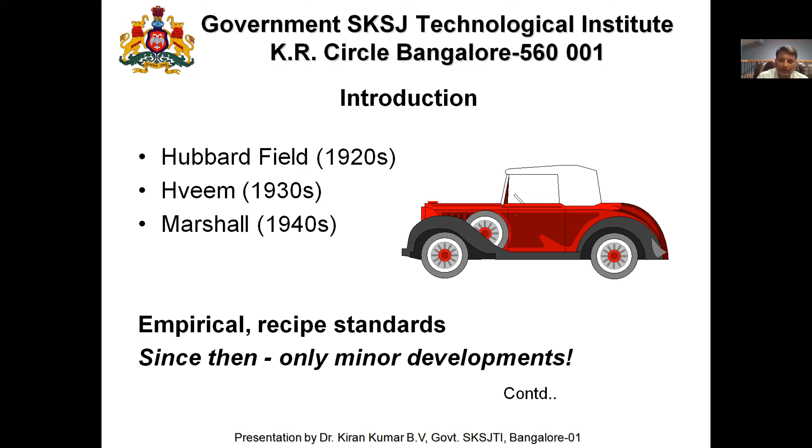So what made me think that we need a change? From the 1940s, if you see the kind of traffic we are experiencing, the fatigue repetitions coming onto the pavement have tremendously changed the scenario, and the stresses are mounting onto the pavement more and more in terms of cumulative standard axles, the vehicles moving onto the pavement, and the weather conditions which are changing due to climatic change.

So wetness again becomes a major issue in many places. If you have witnessed, the failures of the pavement are basically taking place due to lack of proper drainage or the moisture that is coming in. So we need to tackle 3 W's: weight, weather, and wetness. If we are able to tackle these 3 W's in flexible pavement, it is definitely going to perform till its design period. This was triggering and made me search what exactly is happening.

I cannot simply say that the practice from the 1940s, which we have been designing with, is going to be replaced by a new set - people will definitely laugh at me when I try to explain something new. So I had to make some background search, understand basically what is exactly happening and what we need to do further.

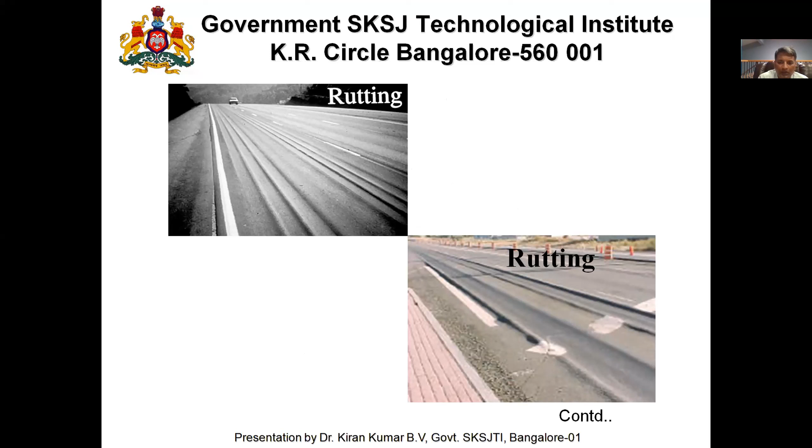I went deeper and found out there are 3 major issues in the permanent deformation sector that the entire world is tackling. That is called rutting, which is basically a kind of deformation or shear failure that takes place on the top surface, and material consolidation takes place on the wheel path. On national highways, state highways, and many major arterial roads, you might have witnessed this particular kind of bowl-like structure, depressions formed on the wheel track.

The next thing was fatigue cracking, basically due to the application of load and release of load, which simultaneously causes a kind of fatigue or bending action onto the pavement. This in turn causes a tensile force applied at the soffit of the layer, the bottom portion of the black layer, which tries to pull on either side - radial tensile strength. This causes a rupture if the bonding or the stress applied is more than what the material can withstand within its elastic range.

It starts tearing apart, and the aggregates which are held together - for your information - are all held with a layer of bitumen at 6 to 8 microns. So the bitumen which coats onto the aggregate surface, its thickness would be around 6 to 8 microns on each aggregate. When they are held together with this 6 to 8 micron thin layer, they are subjected to this kind of tensile force, and if they are not able to withstand it, it starts cracking. People think that cracks come from the top - it's not the way. Most of the reason would be from the bottom.

We need to check when the crack appears at the bottom, where tensile strength is more, then it starts propagating onto the top because there is a discontinuity of load being transferred from the subsequent frequent loading of vehicles or the wheel. When it starts moving on that particular area, it transmits the load, and at the crack portion it acts differently because it is not a monolithic structure. So the difference transmits onto the surface, and by the time it reaches the surface, the damage is already done.

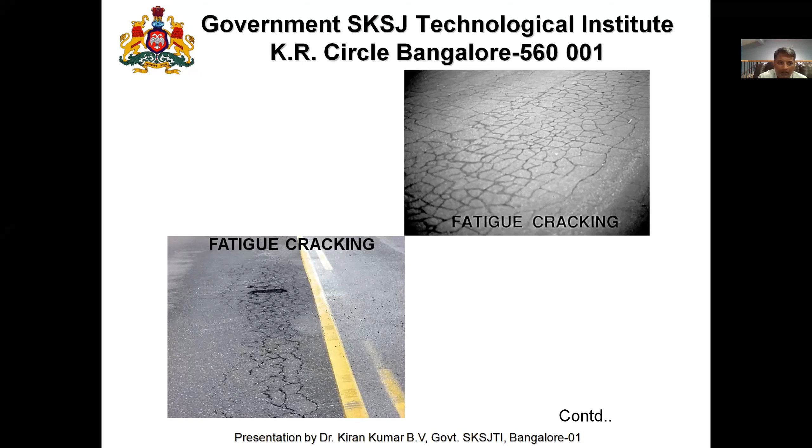The third most common failure is due to frost action, where lower temperature comes into picture. This is very limited to few places in our country. We have this problem when the soil gets moisture, and that moisture completely freezes and forms ice. When frost action takes place, conversion of water into solid ice increases the volume, and this causes separation of the soil layer, pushing it away, which causes discontinuity of load dispersion coming from the top layers, leading to cracking.

When the summer cycle comes, the ice that was formed starts melting and escapes through temperature rise as water or moisture into the atmosphere. Now the separation caused by the expansion of water into ice due to increase in volume, that gap in the soil which has been pushed can never patch up on its own. So discontinuity of load again comes into picture, similar to what you've seen in fatigue cracking.

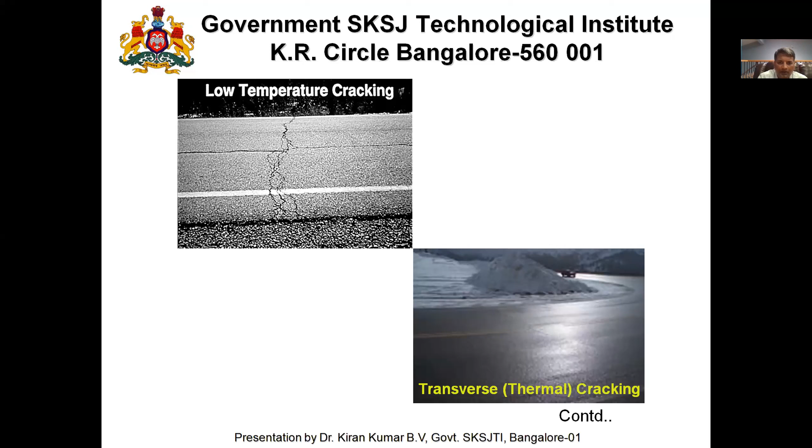Once we understand why this continuous failure is taking place, I started asking all these questions, and as I moved through it, I found there's a thin line between what we call a good and bad mix. It's a very thin line in the definition of calling a mix good or bad.

No one can define that so easily without having certain data which completely supports that this mix has performed well over a period of time. It takes a lot of time to understand that. The design periods have to pass, records have to be created, and continuous monitoring has to be made, and then we can say it's good or bad.

Now, everything good or bad originates from certain laboratory studies only. When the laboratory studies themselves have a lacuna, we are not looking at those lacunae and simply saying the pavement is not performing is not correct. So in that direction, I started looking into why some mixes perform well—what we call good mixes—and why we call some mixes bad mixes.

I started looking into those aspects and collected a lot of data, did an extensive literature survey, went to CRRI, spent about 6 months there, and went to libraries to study various literature available throughout the country as well as abroad.

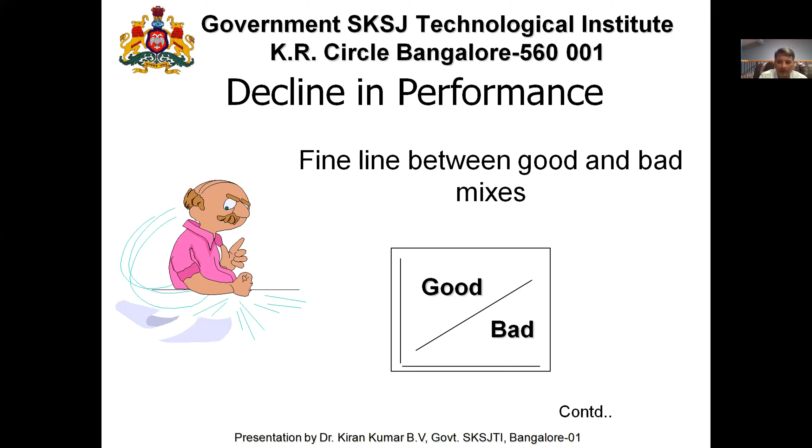So I discussed with a few people like Professor Kandhal and my professors and various agencies handling this. And I found that usually any mix design, irrespective of Superpave or Marshall method, only the compaction procedure is going to change.

But more or less, the steps required for a mix design to be tailored remain the same. First is material selection, second is designing the aggregate structure, third is designing the binder content, and fourth is moisture sensitivity. Now, people in this particular field can understand these 4 steps.

For the general audience attending this session who are from outside our field, I'll tell you the complete picture of what we've been trying to discuss till now. All that you have seen earlier was just an introduction on how the development took place.

Now we are at the stage where we have zeroed down our problem: even though we do all these 4 steps, and carefully choose our aggregate structure and the binder required to hold these aggregate structures together, we still see pavement failures taking place within a premature period of 6 months after construction.

Several times it is within 1.5 to 3 months. I see a lot of cracks coming onto the pavement. Why is this happening? This is a major question I have always been asking.

When there are so many quality control checks, so many people involved, and every point is cross-checked by an independent agency, the PMC looking into it, third-party testing—so many things have taken place—but still the failure takes place. So any mix design or construction basically has these 4 steps.

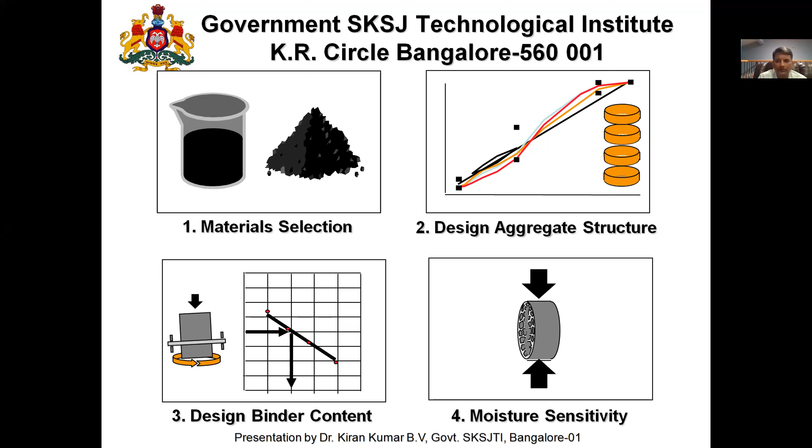That is, both the thawing cycle and freezing cycle have to be looked into. These four steps basically cover the entire mix design, and my focus is always on the third one, because the binder content is the ultimate thing. Without knowing the target maximum density and maximum air void, all the procedures we do will be a waste, since it won't match field conditions. Except for the Superpave gyratory compactor, which somewhat matches field conditions, but it is a very costly and sophisticated equipment. Maintenance of it is always a problem, and it is most of the time under repair rather than functioning.

Now, material evaluation in the first step, in most countries, is based on their grading system. Earlier we had penetration grading, but now we have viscosity grading. Penetration grading is a quick way where people try to understand, by applying a load of 100 grams on a bituminous substance, the shearing rate of this needle for 5 seconds when this 100 grams is applied at 25 degrees centigrade, and how much depth the needle will penetrate. There's nothing concrete saying this is required as a performance test to the field. It is only a quick test to understand the grade of bitumen.

Now the second thing is the softening point test. This test is somewhat similar to the liquid limit, where soil changes its state from solid to liquid with a small shear force at maximum moisture content. Similarly, bitumen changes phase from semi-solid to liquid, or starts flowing, at a particular temperature, when you heat it at a rate of 5 degrees centigrade rise per minute. That change from solid to liquid state is what we are interested in. This is very useful to understand, when the binder is used at the project site, at what temperature it loses its solid or semi-solid state and starts acting as a liquid, flowing away from the aggregate instead of holding it together.

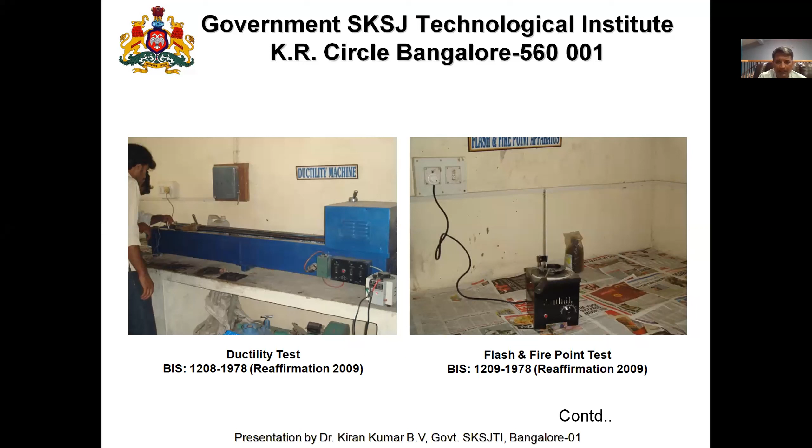Now, all these tests, even today, if you go to the Bureau of Indian Standards, are all valid, and this is what every engineer does to select the material. Any person related to pavement engineering or flexible pavement is doing this in most laboratories, and the higher contractors, the number one contractors handling national highways and expressways with bitumen, are working with these tests.

Now the third - we are into viscosity grade bitumen, which came after several years of this change. The test methods have changed, but most developed countries have moved into performance grade bitumen, PG grade bitumen, which I will explain in due course of time.

Now we need to understand viscosity in terms of absolute viscosity and why we need to understand this. It's because we are handling a material which is a non-Newtonian fluid, basically changing its shear rate with change in temperature. The binder is a viscoelastic material: it exhibits viscosity characteristics and it also exhibits elasticity characteristics. So we need to understand, for a given material, how it behaves as a less viscous material and how it behaves as a high elasticity material.

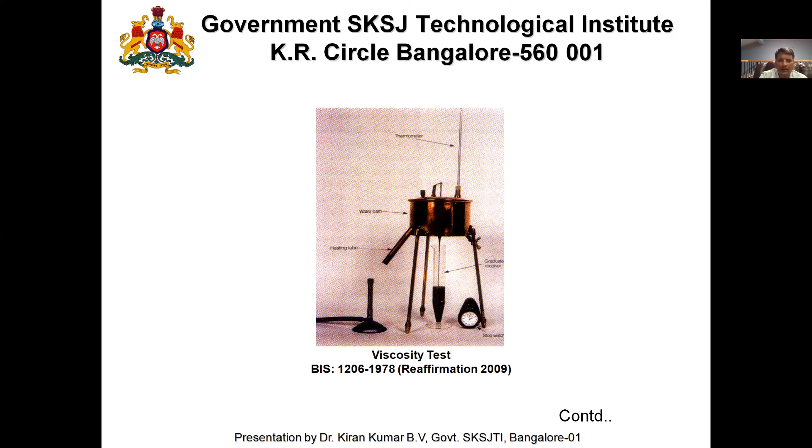We need to check and understand this for better design of the pavement layer. Viscosity gives us an idea of the binder: when it is to be handled, pumped, transported, coated, and the resistance when this coating is done on aggregate. When the temperature drops, how it binds together and holds the matrix together, and when it is compacted and gets densified - all these depend on viscosity.

Now I was talking about something called PG grade, which is a performance grade bitumen produced by most developed countries. When we look into these specifications, why I'm bringing this up is that all this time we were learning what we do in India. Even today, we are following the same specification with certain modifications. In 2013, if you look at IS 73, for the choice of bitumen with all the tests I told you previously, 90 to 95% of those tests will be followed.

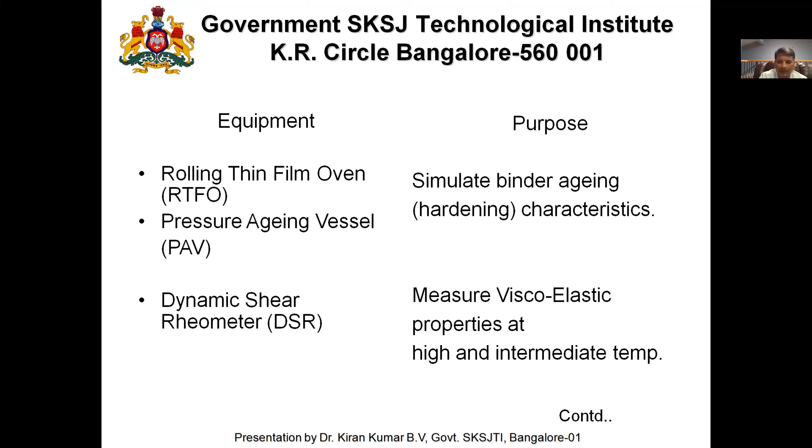There are certain changes, like aging characteristics added with RTFOT, whereas in other countries this is routine practice. They test for 3 criteria: one is for aging, another is to measure the viscoelastic characteristics of the bitumen so that they can tackle the mechanistic design of the pavement - the design values from this test go into the pavement design.

Then we have the rolling thin film oven test, which is for short-term aging. This occurs when you are heating the bitumen and pumping it from the reactor to the bitumen tank or to the bowser for transport. The bowser then reaches the contractor's place, where it is again heated to keep the bitumen in a liquid state so it can be easily pumped from the bowser or truck to the contractor site's tank.

The pressure aging vessel is an accelerated test which tells us about the bitumen's aging characteristics after 20 years - meaning after construction, how the bitumen will harden or age due to the presence of oxygen and UV rays from the sun. All these are routine tests in developed countries for material selection. We are not doing this, but without this exercise we still expect the bituminous mix design and the engineer to sustain the overloading that we are causing.

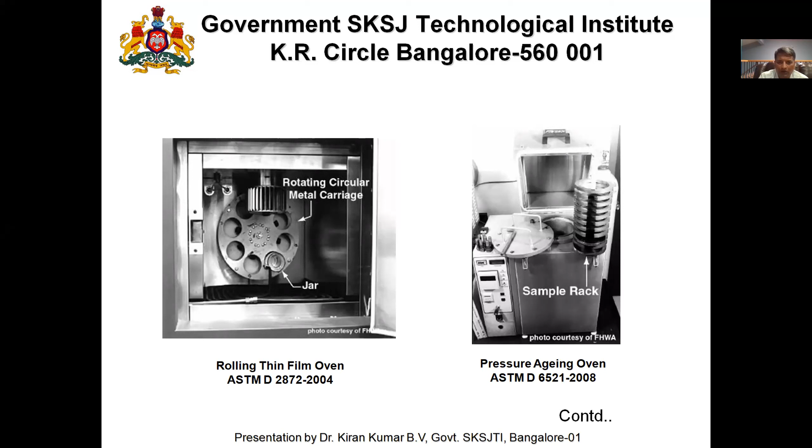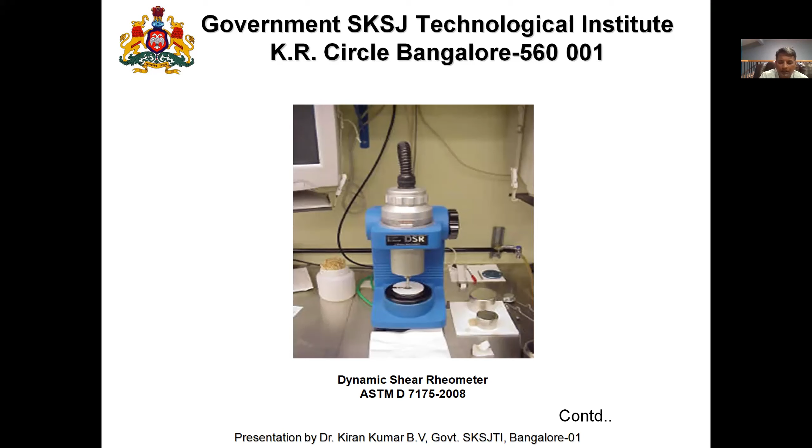Now this is called a dynamic shear rheometer, used to understand the viscoelastic characteristics of the bitumen. This itself could be an 8 to 10 day course - learning how to do this dynamic shear test, how to do strain control and stress control tests, how loading is applied, and how to interpret the results and transfer them into field conditions in terms of complex numbers that come out when shearing force is applied onto the bitumen sample.

Then we have the rotational viscometer, instead of the standard viscometer seen previously, where we try to measure the characteristics of the binder during flow. Then we have two simple tests, the bending beam rheometer test and the direct tension tester, which are used to determine the elasticity behavior of bitumen at lower temperature.

That is why in foreign countries, when a PG grade is mentioned, such as 62 minus 12, it means the binder will hold its viscosity at 62 degrees centigrade higher temperature, and will also hold its elasticity at minus 12 degrees centigrade. That is called the performance grade - on both the higher side and the lower side, the bitumen will work.

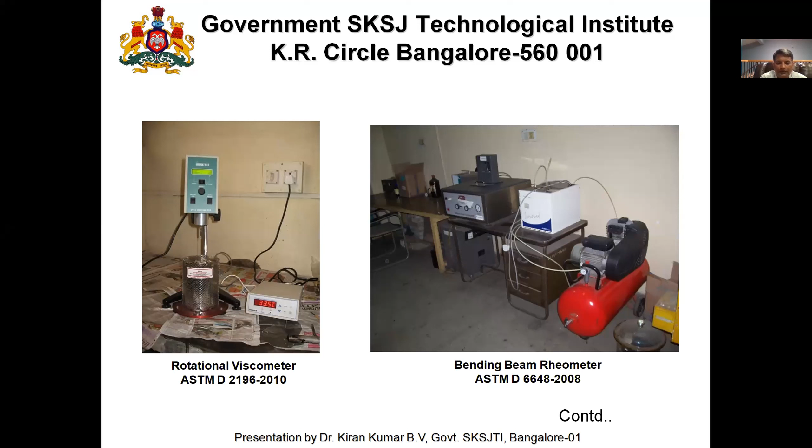Now these are the equipment where you can see the rotational viscometer and the bending beam rheometer. It is a small asphalt beam on which 3-point loading is applied. The slope is taken, and we try to find out how the failure takes place.

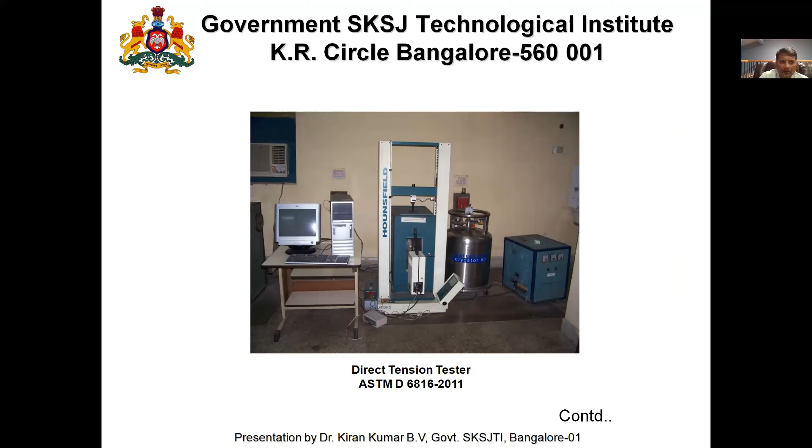This is a direct tension tester used for testing the binder when its values are not being accurately determined by BBR, bending beam rheometer. These are required to understand how the pavement behaves in the later part of its life.

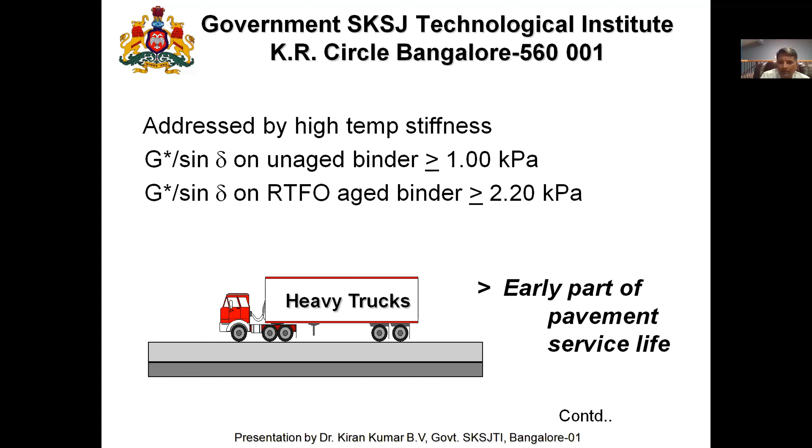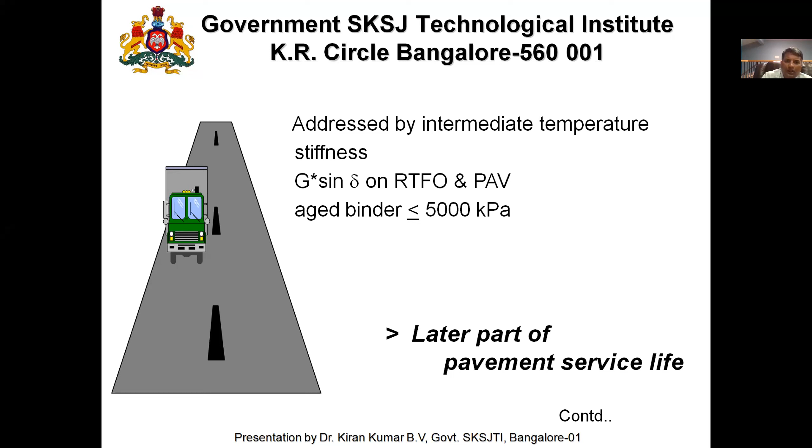So these complex values, the G star by sine delta for unaged binder and aged binder, are given here. The minimum value should be greater than this. Then after aging, meaning during the service period and in the later stages once the service period is over, again we have values of G star sine delta after aging through RTFOT and PAV, whatever value comes, whether it falls within this range of 5000 kPa. All these things have to be determined before finalizing.

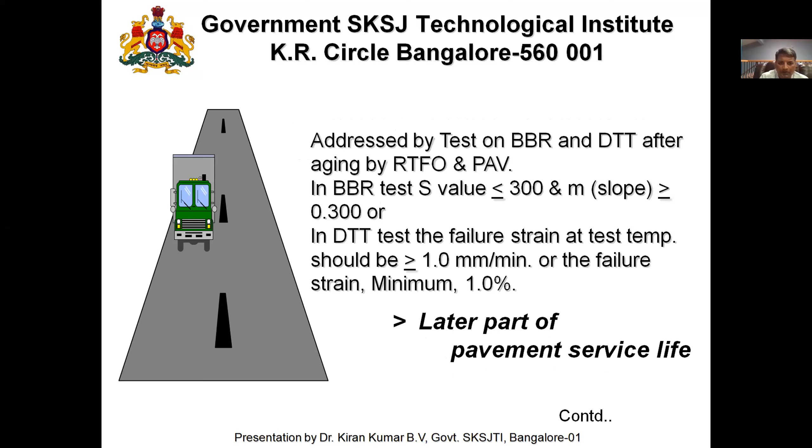Similarly, for the test of low temperature cracks, all these are related to my 3 failure modes: rutting, fatigue, and low temperature cracks. These 3 have to be tackled in the test, and that is why these particular test examples or processes have been developed.

Now I was talking about the grading system based on climate. I have given an example: PG 64 minus 22. PG means performance grade binder, based on the 7-day average maximum pavement temperature collected over a period of several years. That is what the higher side indicates.

Minus 22 is the minimum temperature that area would experience, or the project for which the pavement is run would have experienced. So 64 minus 22 means the binder will hold its viscosity without changing from solid to liquid even at 64 degrees. At the same time, if the temperature falls to minus 22, the binder will never become brittle, it will hold its elasticity even at minus 22.

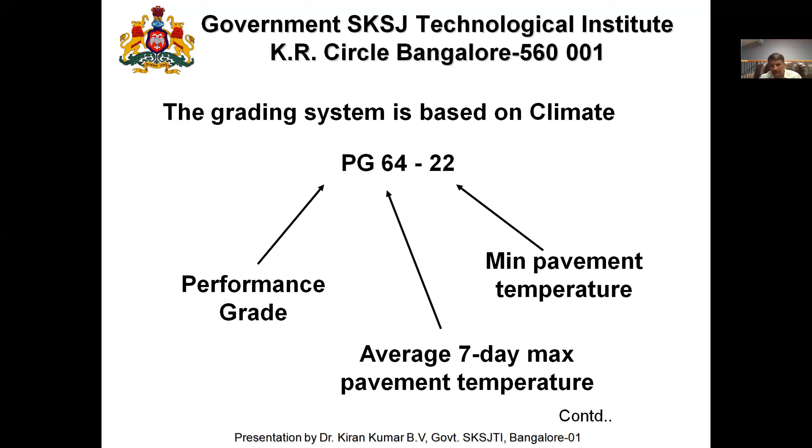So this is a kind of grading system based on climate, and most countries are following it, but we are not at this stage.

Apart from this, under material selection, everything else remains the same, because aggregate coarse angularity, fine angularity, toughness, soundness, it all remains the same. I will not take much time here, I will just get into it. Your shape factor or combined index remains the same, and it is done in a very simple manner.

They take this particular ratio as 1:5. Instead of going for 0.6 times the average dimension and 1.8 times the average dimension, they have fixed it as 1:5, meaning if the thickness is 1, the maximum length the aggregate can possess is only 5. If the thickness is about 10 mm, the maximum length allowed is about 50 millimeters.

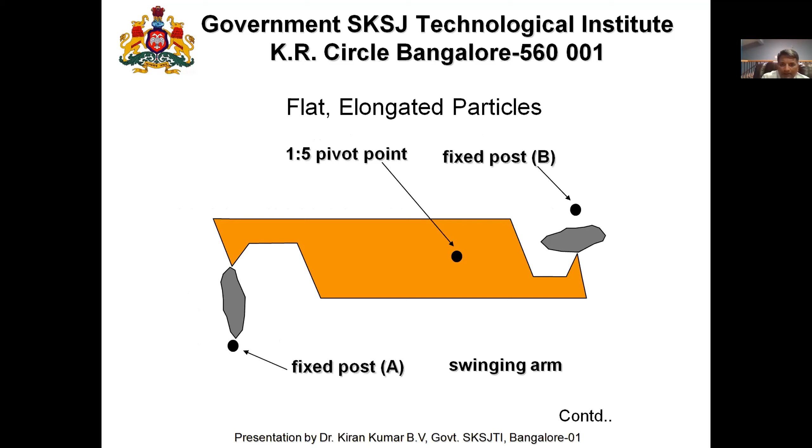And the second one is design aggregate structure. The SuperPave has given several control points through which it has to follow. That same thing has also been taken into account, and even the Ministry of India gives you the upper and lower limits. Everything is targeted to the maximum density that needs to be achieved for the mix design.

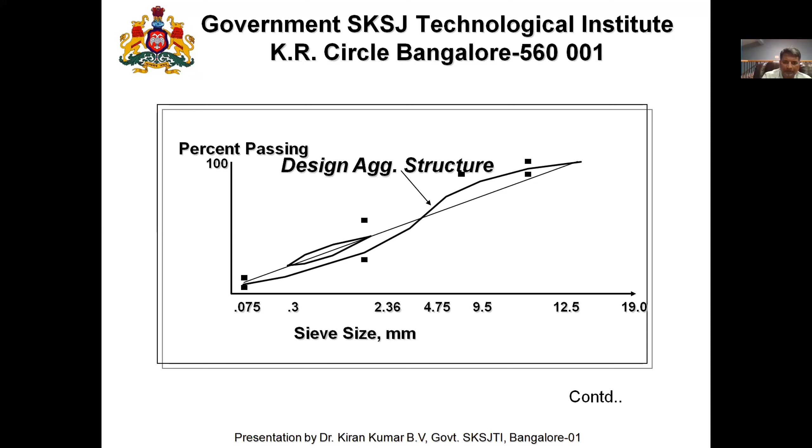Now we are at the third step, the design binder content, where it is most important that the compaction is done with respect to the traffic. What do you mean by traffic? Now, if the pavement has to breathe, we need to look into the phases of the pavement layer. The top layer consists of aggregates, it consists of bitumen which is liquid, solid, semi-dense liquid, and then you have your air voids. Now these three have to be balanced if we want the pavement to work really well.

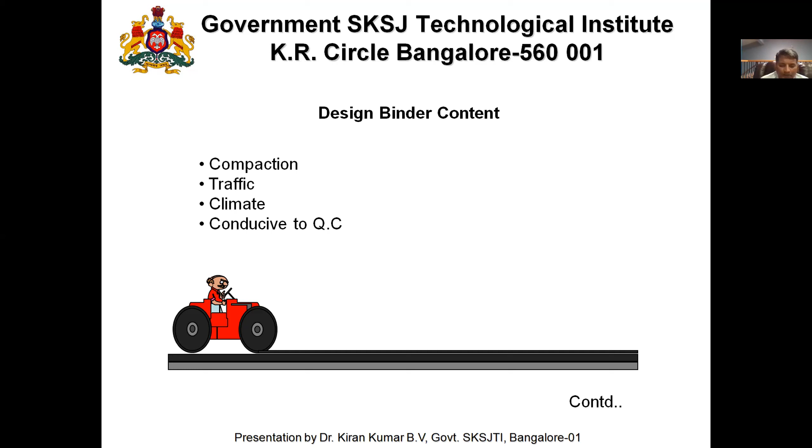So initially we do have a targeted air void content up to which the pavement is to be compacted in its service life, meaning I will have a pavement with about 6% air voids. Now that targeted air void is about 3%. From 6 to 3, the decrease in air void content by filling up of solid takes place due to the post compaction effect of the pavement.

Under open air, it needs to cool down for 24 hours for further processing. But in case of the gyratory compactor, you need all kinds of inputs to be provided. A lot of effort has to be taken. Binder to dust ratio has to be maintained, and there are many things which basically cause difficulty when there is a failure of this equipment due to moisture and other harsh conditions in the laboratory as well as in the field.

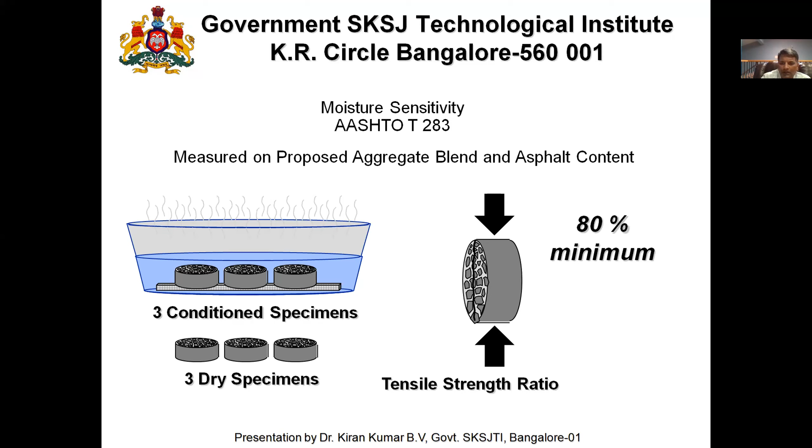So till now you have learned. I'll just give a break here for you people to reflect on what you have understood. Even I need a break, I'll just take a sip of water.

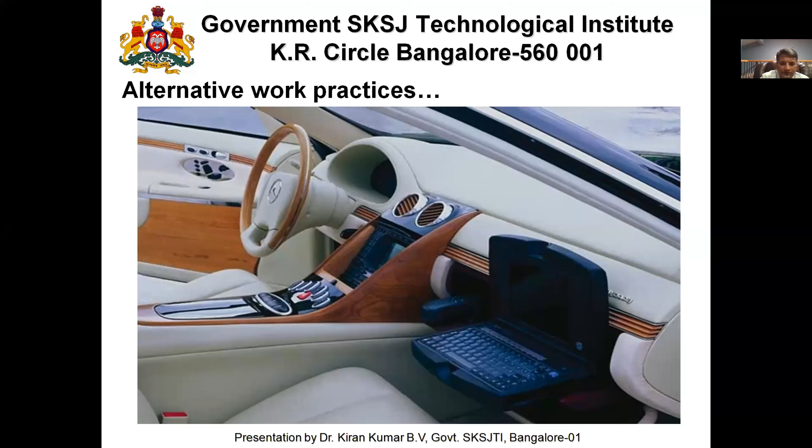These are the things we are expecting from the mix design engineer. All our roads should work elegantly with all this sophistication. We are spending lakhs of rupees of taxpayers' money. Why are the engineers not capable enough? These questions are asked, so I am making this comparison. This is what you are expecting, this kind of service, an elegant meeting room inside a car, a communal area to share your thoughts about what exactly has happened.

Yes, in America three things are very different: weather, wheel load, and the kind of wetness. The climatic change is erratic there, so they do this particular exercise. But in India, we have tropical climate, 90 to 93% of our geographical area is on the hotter climate and very little on the lower side. Do we require a temperature test for low temperature zones, where we need the BBR test, DTT test, and direct tension test to be followed? This is not at all an essential component for us.

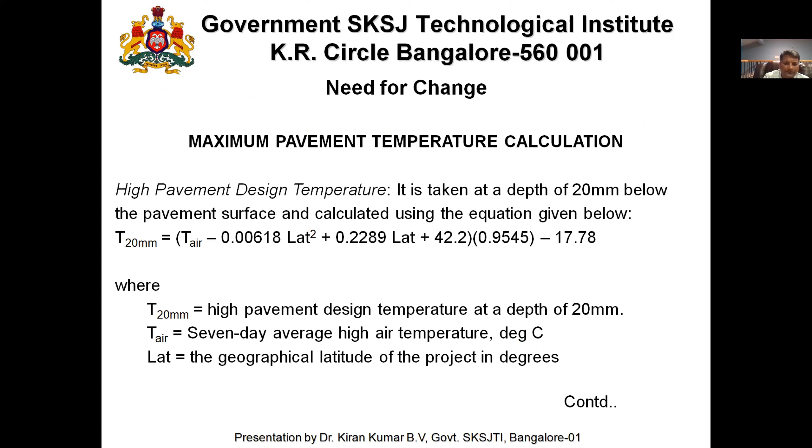How do we check this pavement temperature? It can be checked by making a small hole of about 20mm depth, applying glycerine onto it, and placing a thermometer there to take the pavement temperature. Instead of that, we used two equations for that 20 millimeter depth, substituting the latitude of that particular place and using this constant along with maximum and minimum air temperature, to calculate the maximum pavement temperature.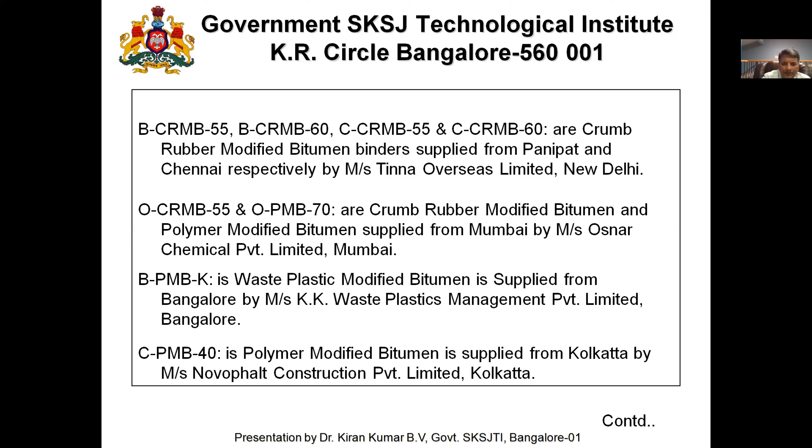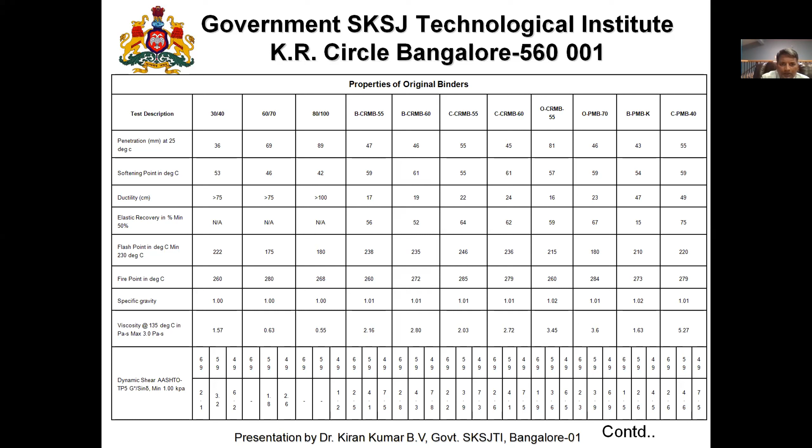So all this data was collected, and we gathered several types of binders manufactured by various agencies that have been continuously supplied to national highways and state highways. I did all the research, took up all the tests you've seen earlier - penetration test, ductility test, and various other data. I'm sorry I have to compress this into one slide. Many of you may not have used a laptop, or if you're using mobile, I apologize for this compression of data. Maybe the organizers can share this presentation so you can get the slide and understand the values.

So we did short-term aging on this and ran all these particular tests on the binders being used in India for construction.

Collecting all this data, our temperature or binders which we have been using, even today what they use by your BIS 73 VG grades, are not able to cater to the temperature ranges we calculated based on actual temperatures measured by the Indian Meteorological Department. Bangalore alone requires a 60 centigrade binder to cater, or a PG grade of 59 to 60, wherein our softening point of VG40 does not even cross 50 centigrade.

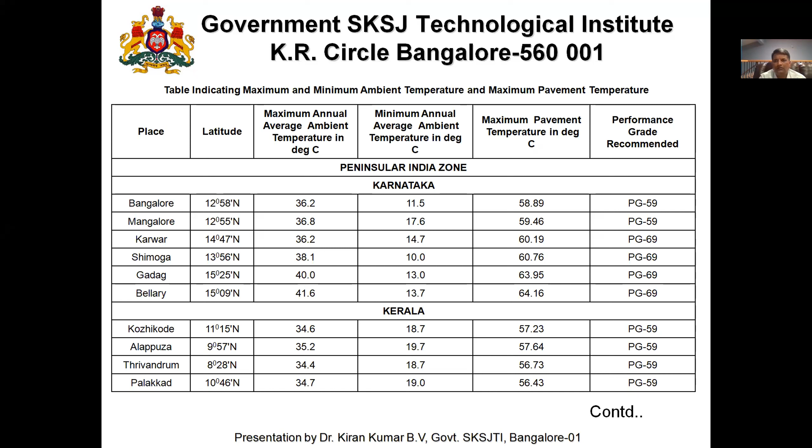So what exactly is happening, where are we failing? Then again, if we use this binder and the Marshall method to compact, the Marshall method gives us an erroneous optimum binder content, because the carefully chosen aggregate disintegrates. Once it starts disintegrating, the disintegrated surfaces require higher binder content, and that binder content cannot be accommodated within the air voids we are designing for. So we are at fault somewhere at the beginning stage itself.

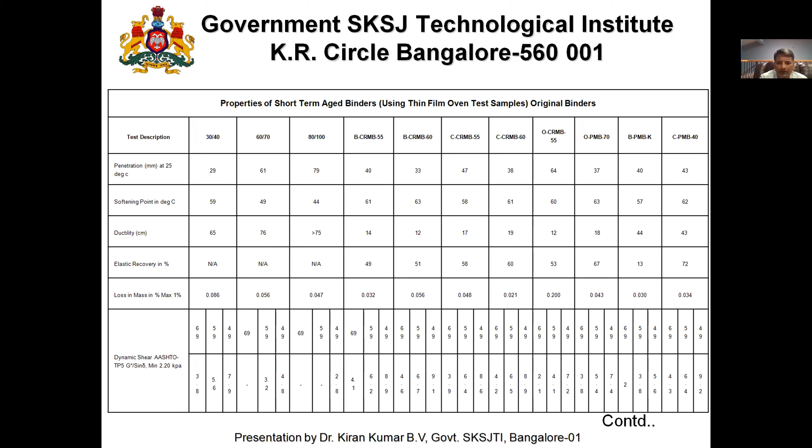In the laboratory stage itself, we are at fault - that's why I showed you this video. Now what are the results? Where exactly are we going wrong? Even our aggregates are absolutely the best. You can see the results from all the necessary tests - combined index, soundness, abrasion value, everything is perfect. Then why are the pavements failing?

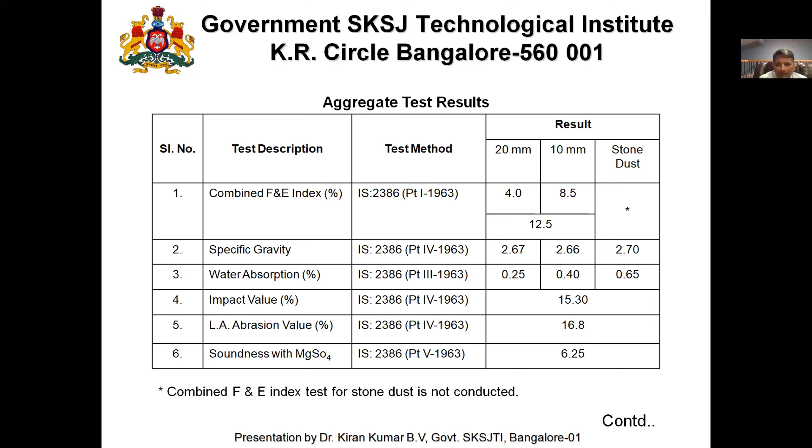The selection of the aggregate structure is also well within the permissible limits given by the Ministry of Road. We compared that with our Superpave values also, to check whether the Superpave values follow, or whether the aggregate chosen under the Superpave method would match our Ministry of Road Transport and Highways specification. Once we did this, I was in a fix.

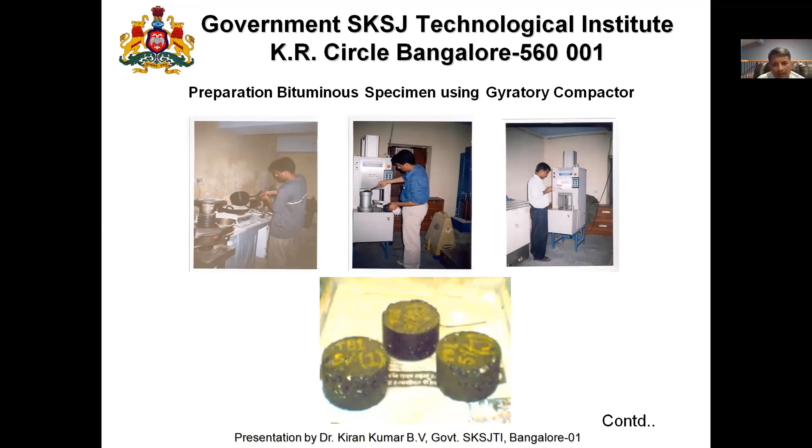So I thought, let me do more research with my friend. We went to CRRI, did all the tests using the gyratory compactor and Marshall method, keeping every specimen with the same binder content and aggregate. Then I came out with my own indigenous design called the rolling compactor cum rut analyzer. This is where we are actually learning today what exactly we had to do.

That was the complete background for this particular study.

This roller compactor that I'm designing in the laboratory is similar to the roller which is there in the field. It rolls, and through kneading, it densifies the aggregate, or the bituminous mix.

This densification data is also captured. When the material becomes harder and pushed together closer, without causing damage to the aggregate structure, a targeted density is taken into account, and the volume required for that density is compacted from loose thickness to final thickness, where the densification data is obtained.

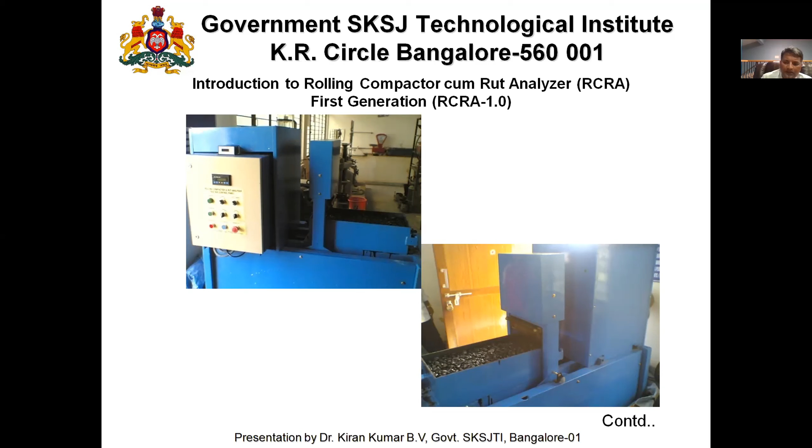I'll show you this, the first generation, when the thought process took place, with the limited funding available through industry-institution interaction. Any research requires funding, and we cannot spend from our pocket on such investments running into lakhs of rupees. So the industry sponsored us some money, and we did the initial design, calling it the first generation rolling compactor rut analyzer. It's an active model.

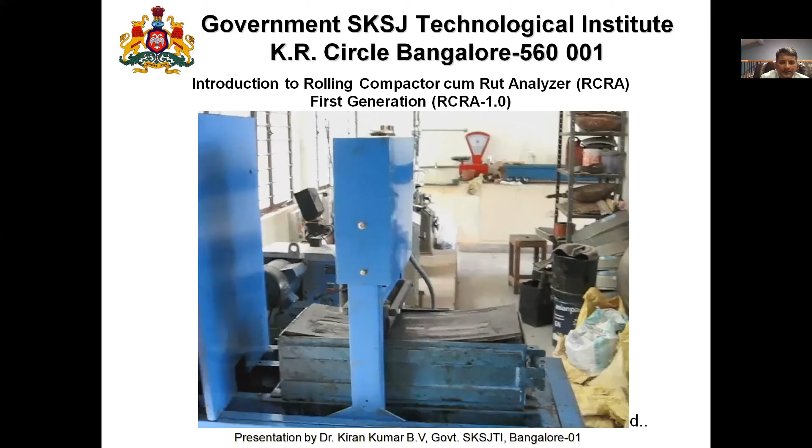In this video, you can see the wheel moving on an arc plate, a segment of the roller in arc shape. The segment on which the roller moves is a hydraulic pressure roller with oil pressure maintained by a non-return valve for constant pressure.

When the wheel starts moving, its relative position compared to earlier is taken into account to see how much it is digging. So automatically, when densification takes place, a signal is passed to the equipment, the roller switches off and comes back to its original position, and the specimen is ready.

There were many drawbacks with this first roller compactor rut analyzer, because of the reversing of the oil and cylinder, causing a time or phase shift. There were pressure losses even with a non-return valve. The hydraulic machines have a minimum effort threshold, and the pressure needed for the roller plate and piston had to be redesigned to achieve the effect we were looking for.

Once the drawbacks of the first generation were known, we took up the second generation roller compactor cum rut analyzer, and went to the ministry to give a presentation. It was a second generation design.

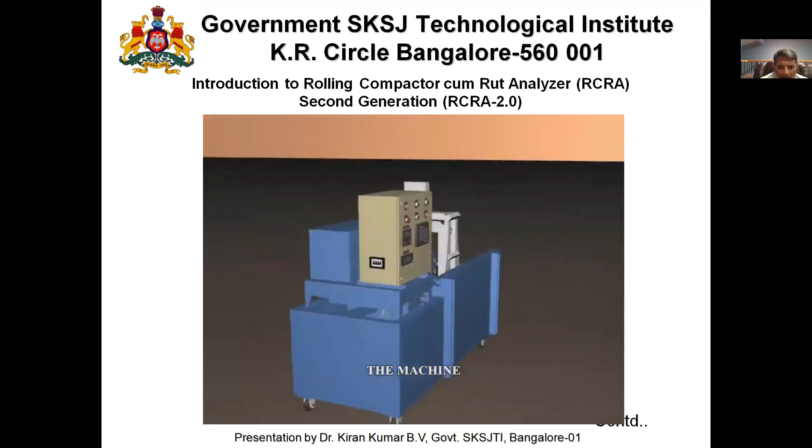This time we had a lot of knowledge, and we made a complete animation series to explain the working of this roller compactor cum rut analyzer. The machine itself was 3D modeled, and the oil tank requirements, the pressure that can be generated, and the depth of the equipment were all pre-planned and finalized.

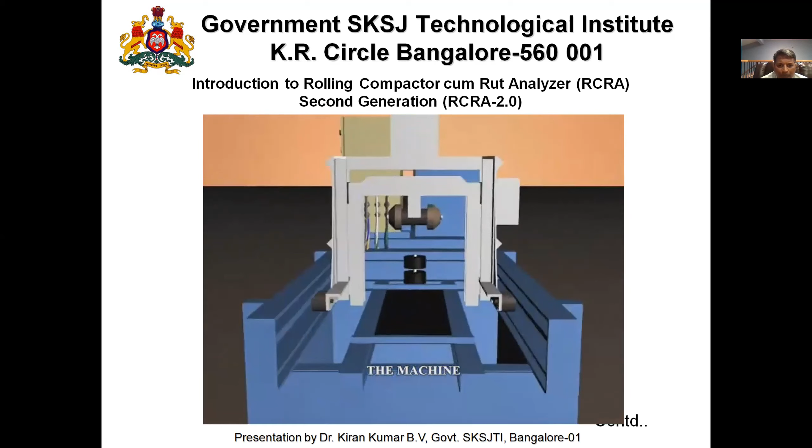Even the mold and handling of the mold to compact these layers of bituminous material, keeping them in warm condition with heaters, were added. The mold could be easily demolded by just lifting two rods, and could be split into three parts, allowing us to compact the material.

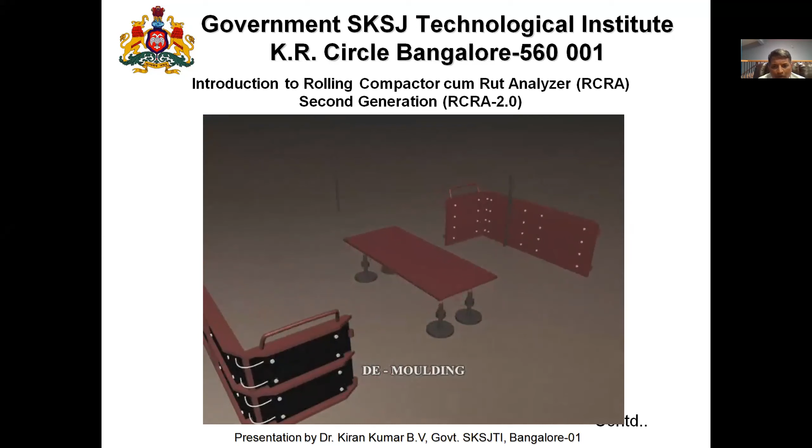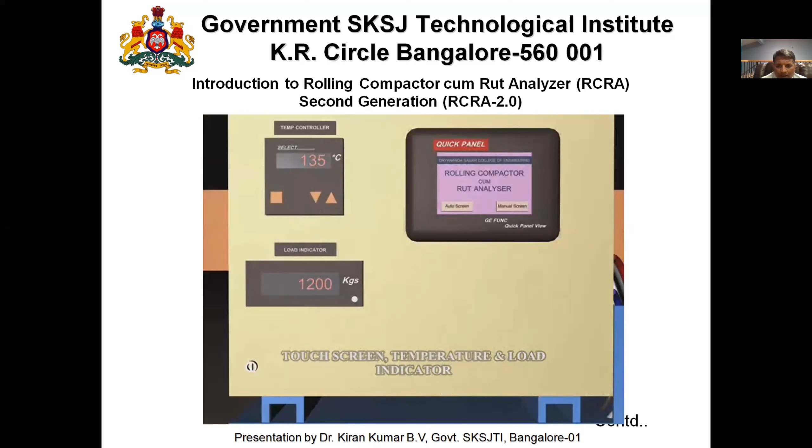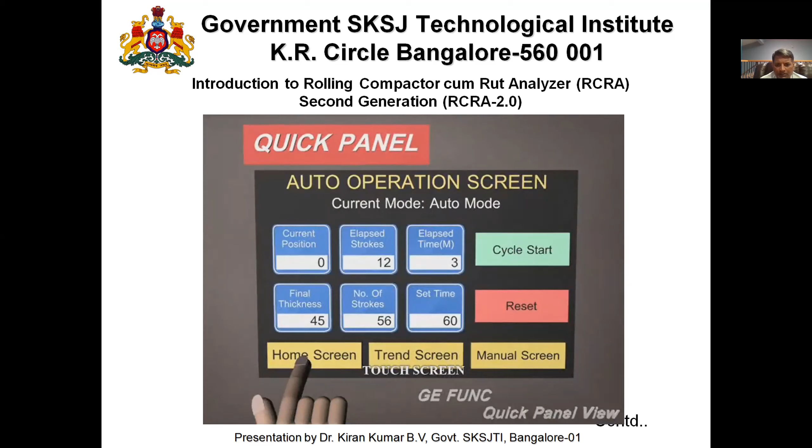The movable plates, moving up and down through a screw jack, gave flexibility for the loose mix to be compacted to the final mix, accommodating the complete operation and the thickness of the pavement layer. It was completely touchscreen, with human interference removed by adding auto screen and various PLC operations. We did the complete exercise, got the funding, and built this equipment.

We did not stop there. After compaction, we thought, why not also have a second mode of working in this equipment to determine the performance of the given bitumen. So to do that, we added a rutting mode where the specimen, once completely designed using the optimum binder content.

A set of wheels was made to run to and fro with a selected tire pressure. For example, if you want to apply 6.1 kg per centimeter square tire pressure, we wanted to monitor how many passes it takes to cause rutting damage of 10 mm or 12 mm.

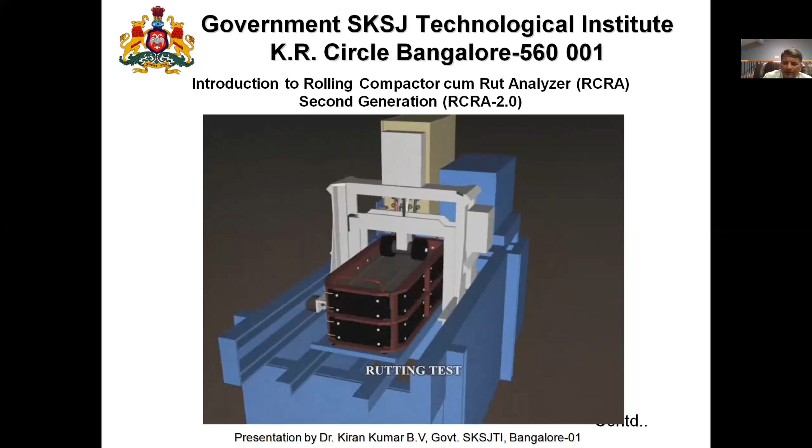So there we added a set of wheels to this equipment, and those wheels were running to and fro, causing this particular indentation or the rutting test. The number of passes required to cause the set depth was recorded and captured in a PLC memory slot. Now this is how the second generation looks.

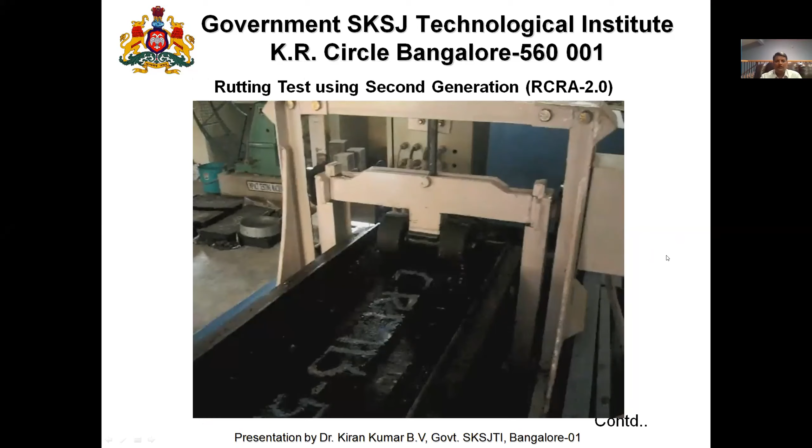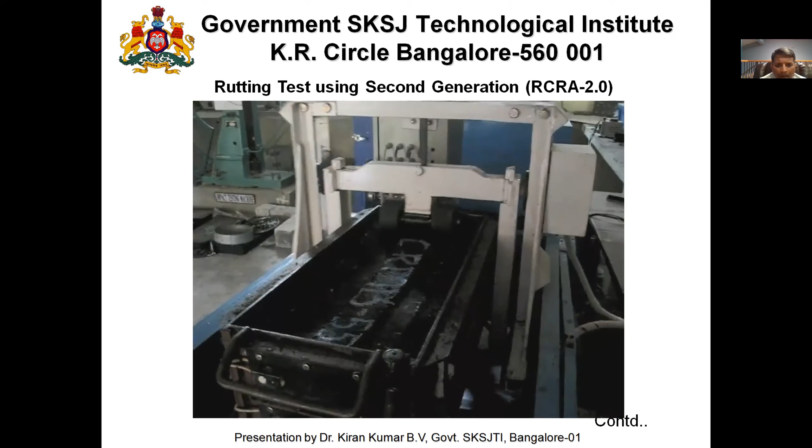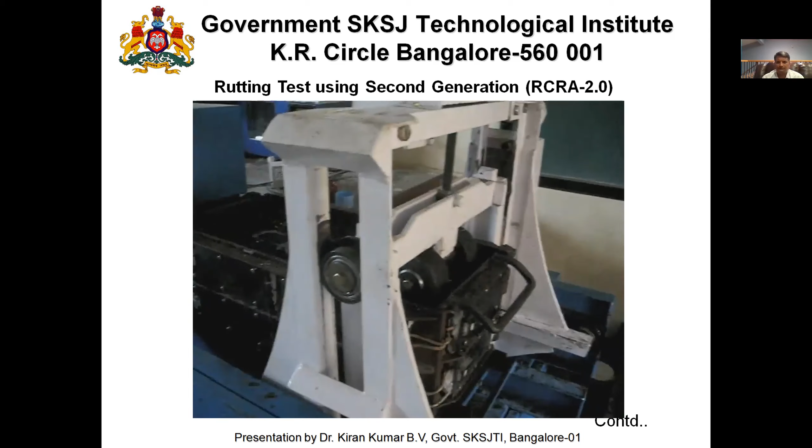That was the complete animation. You can see the working model of it. We are carrying out a rutting test where the specimen is cast and temperature is maintained at 60 degrees, 55 degrees, 40 degrees, or higher if you want, 70 degrees. How does this pavement perform, because if you see Rajasthan and other areas, we have pavement temperatures roaring about 75 to 80 degrees. Bangalore itself is 60 degrees. So if you want to maintain that temperature, you need the support of heaters. This is how the rutting test works.

Even then, our quest for a complete scenario of designing the pavement layers in accordance with field conditions was not there, and luckily IRC 37 came into revision in 2012, and then in 2018 they framed this particular guideline on the same lines. We wanted all 8 plates which are there in IRC 37 2018 to be tested at the laboratory, so that we would be confident to transfer our mix design to the field. Whereas in case of Marshall, this possibility was not there at all. The optimum binder content of the specimen prepared using the Marshall method, how do you use that same quantity to construct or cast a slab? It was a great difficulty for us.

So that is the reason we tried to completely change this particular scenario, and we did a 3rd generation RCRA compaction. What is this RCRA 3rd generation compactor? It is a self-explanatory compactor. I'll give you the explanation because it may be in the local language Kannada and many participants are across the country, so I will try to explain it in English.

Now this specimen, or this particular rolling compactor cum rut analyzer, is a complete depth of pavement. Whatever composition is there in IRC 37 2018, the same combinations can be constructed layer by layer in the laboratory. It is a model box study. There are strain gauges embedded in these layers, and their values are also captured when the wheel load is applied.

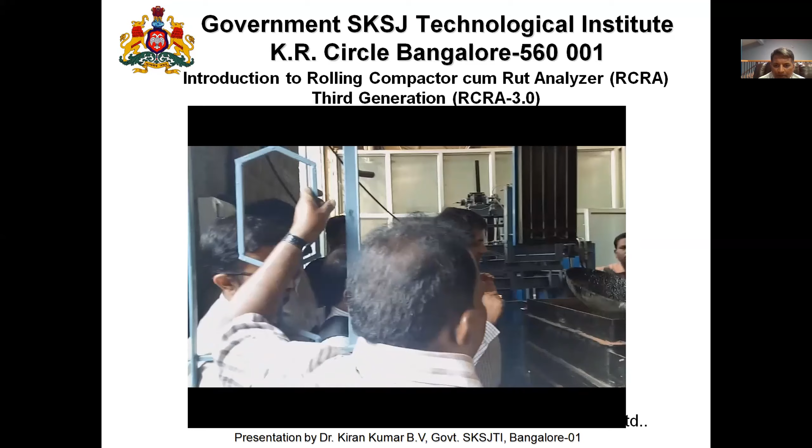Now you can see the top layer being constructed. We are doing the mix design and constructing the top layer. The mix design has already been done earlier using this rolling compactor rut analyzer. Now we know the total quantity of the top layer that is coming. We have mixed and applied the top layer on the prepared layers of the pavement. After the DBM layer, the BC grade 2 layer is coming onto the top.

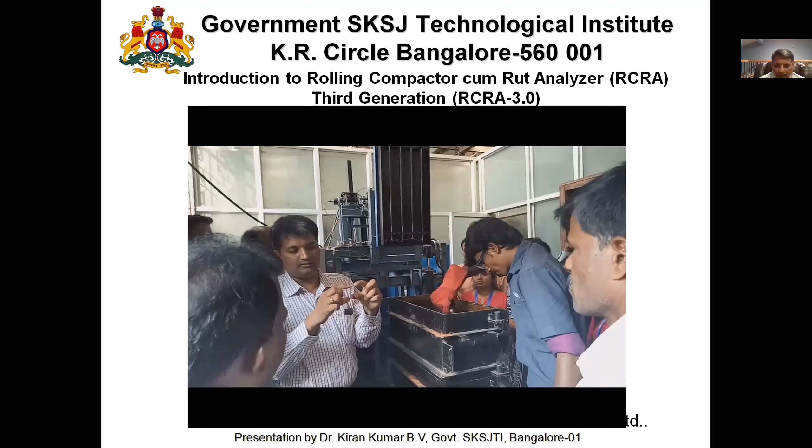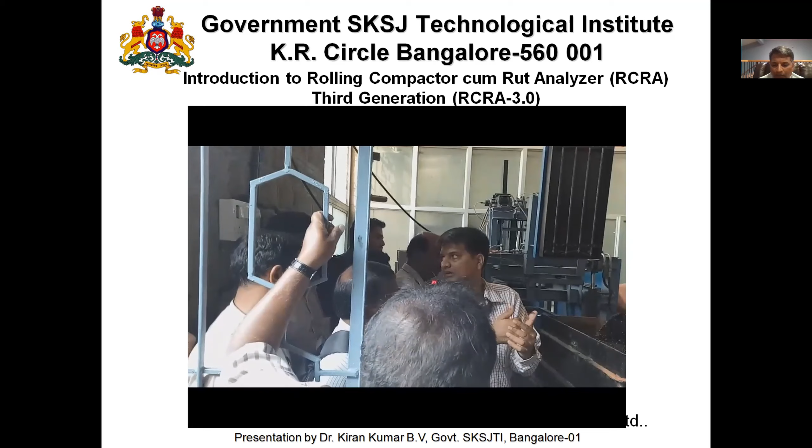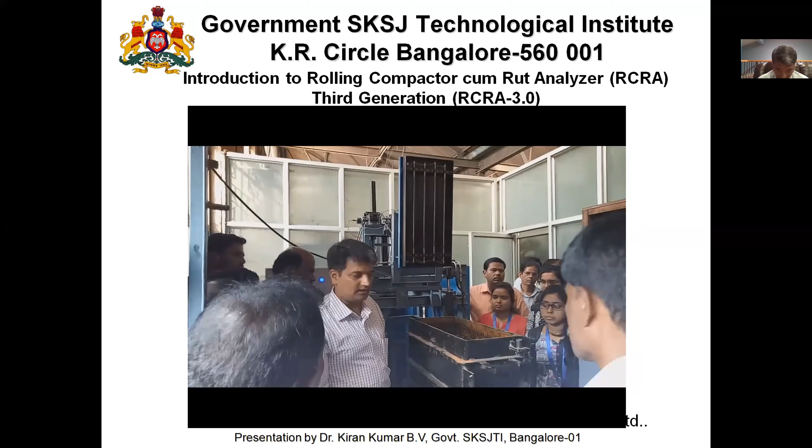Once this is done and the complete box is leveled off, we are going to place a kind of roller which sits on an arc. This arc is a small portion of your total drum, like in a roller. This arc will cause the kneading effect when the load is applied on and on its segment. So the kneading, along with the pressure, causes the material to settle down or compact together, bring together, densification takes place, and it also gets scope for further movement without disintegrating. We are going to densify the layers without disintegrating them. So you can see we are preparing the arc there.

An oil is applied, non-sticky, so that the bitumen doesn't stick to the surface, and the arc is placed. Once this arc is placed, the entire pavement cross section constructed in this box is just slid into that particular roller compactor, and then it is locked.

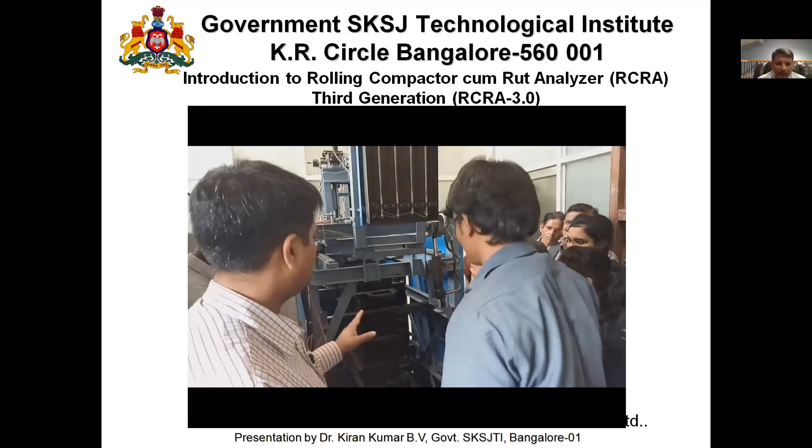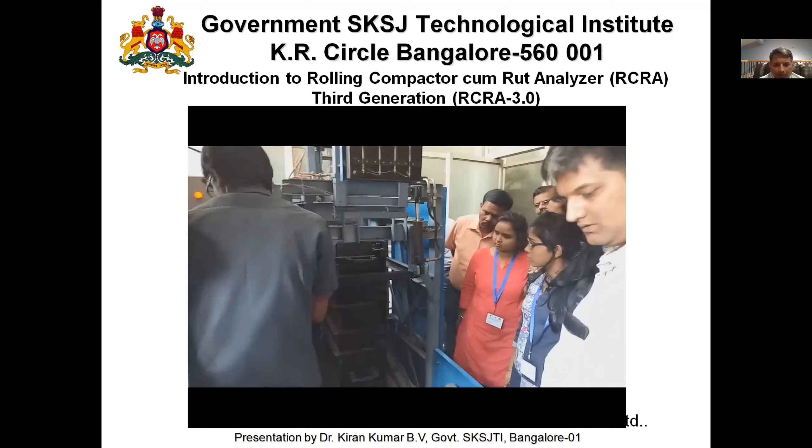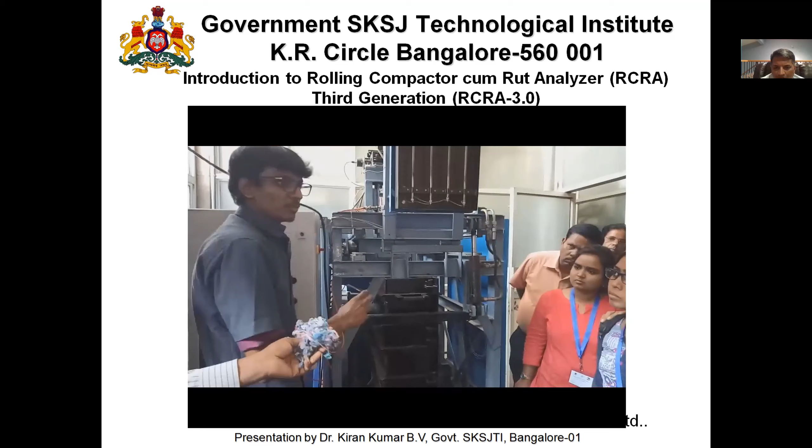Once it is locked, it cannot come out, and the sensor gets activated only once that bar is placed. Now we will enter the requisite data: what should be the total depth of compaction that the layer should undergo, and what is the overall thickness of the layer that should rest on the DBM layer, which has already been constructed. If it is 40 millimeters, the loose thickness will be about 80 millimeters, for example. So we are keeping 40 millimeters to be compacted, and once the material starts densifying, the data gets captured in the PLC.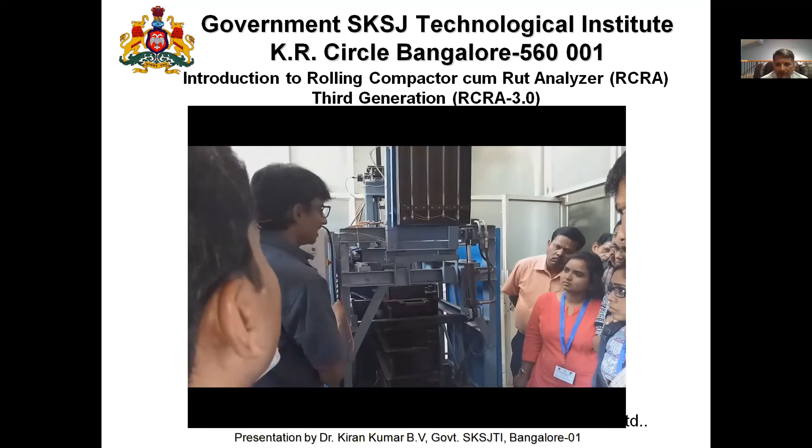Now, once this is all done, the specimen is completely compacted, and the specimen which is as per the plate given in IRC 37/2018 can be done in the laboratory before transferring this to the field. The pavement layers which are going to come onto the field are already there.

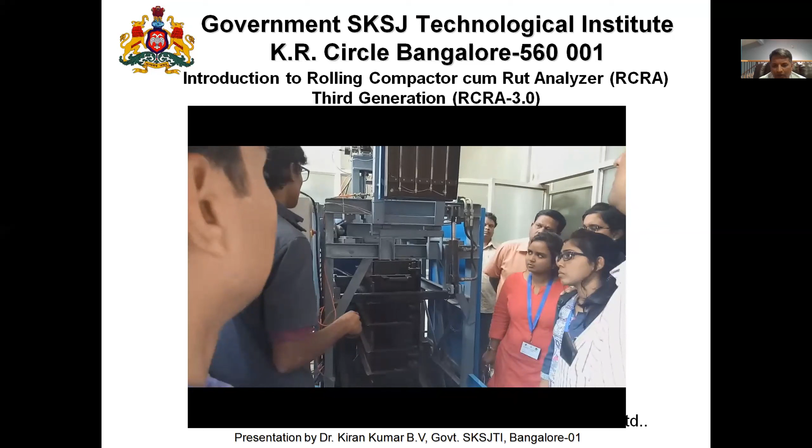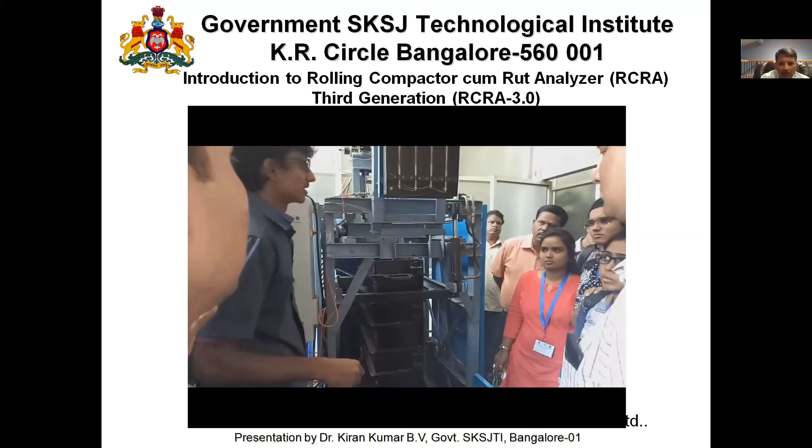Now, once this is done, the rutting test can be done using this particular RCRA. Since time is running, I will skip this video to show you how the rutting test is conducted. Now, if you see the third generation, from first and second, you have seen the improvements that have been done. The complete depth of the pavement can be done in the case of the third generation.

Now you see how the rutting test takes place. This is what the rutting test looks like as it progresses on the surface of the pavement. You can see the tires running on the pavement and causing that particular mark.

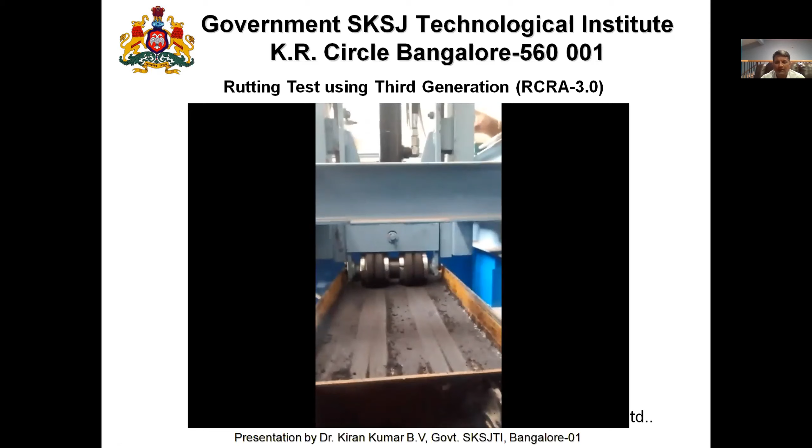Now, the load applied onto the tire depends on the maximum tire pressure that comes onto that pavement, determined using the axle load survey. The actual axle load survey is done, and from there, the maximum load and tire pressure being applied are taken into account to conduct this particular test.

So the roller is removed and the wheels are put in together, and then we are doing the rutting test. This is a performance test. But there is one step I have still not shown you in the video.

Now I am showing it. The previous video was about the preparation of the slab or the entire pavement composition. After that, we will try to apply the load using this roller.

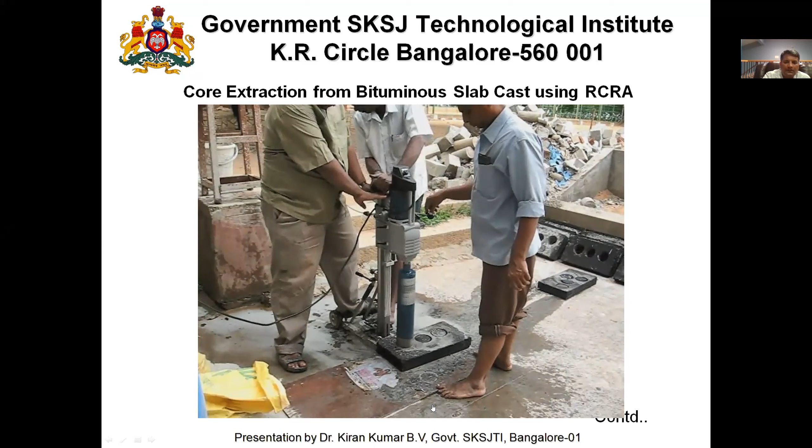Now, when the design has to be made, we need to understand whether the densification has taken place and whether the stability comes into it all. So for that, the slabs can be compacted using RCRA, and you can see here these are the slabs which have been compacted, and you can take the core to do all the tests like the Marshall method test or any indirect tensile strength test.

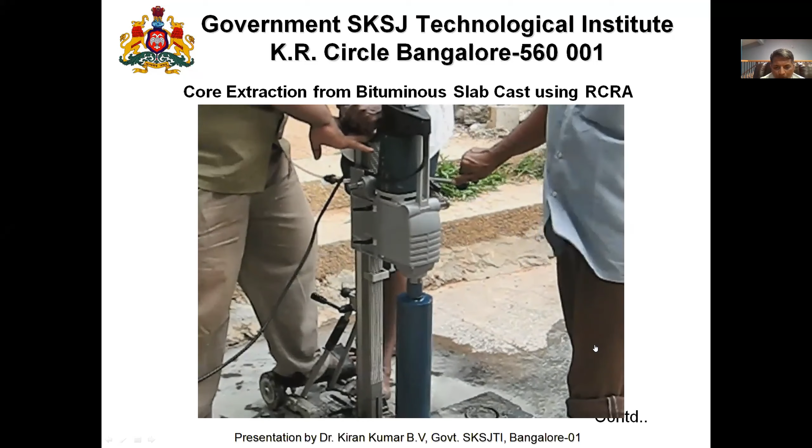All these things can be done, and the core can be extracted from the slab using this core cutting machine. It is similar to your pavement field, where the slab is subjected to this particular core extraction.

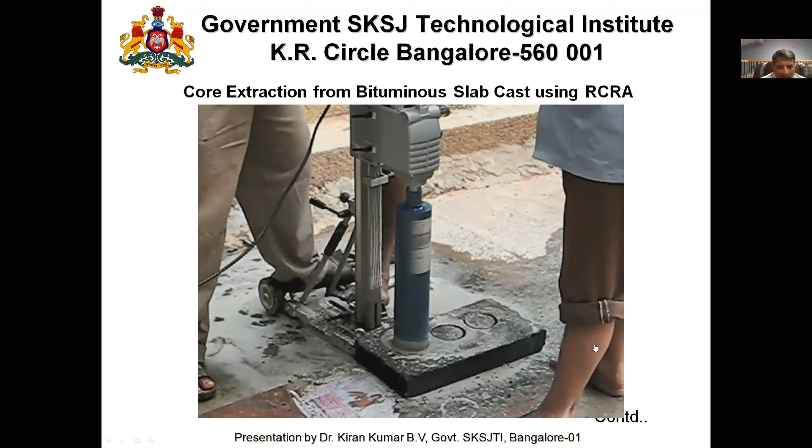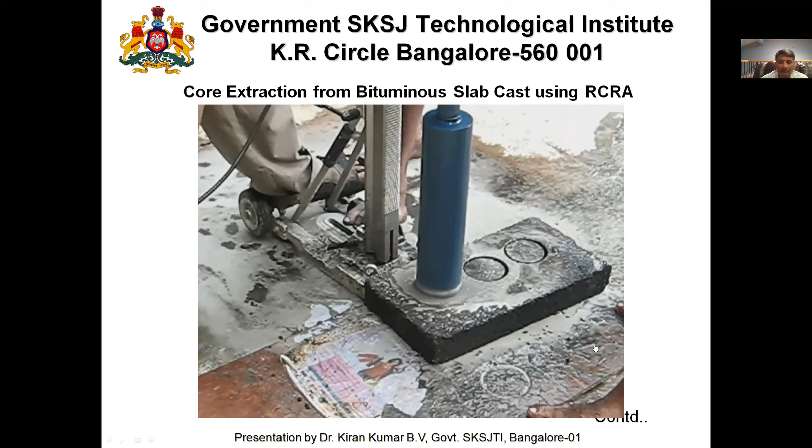And the densification data is already known, either by using the sand replacement method in that particular hole, and once that is all done, it is patched. Now, in the same way, once the core is drawn from the slab, this slab you can see is a slab of DBM which is being constructed using this particular RCRA.

Now, once the slab cores are taken out, you can do the test. You can see here, can you see the specimen being lifted in the core? You can see the specimen comes out.

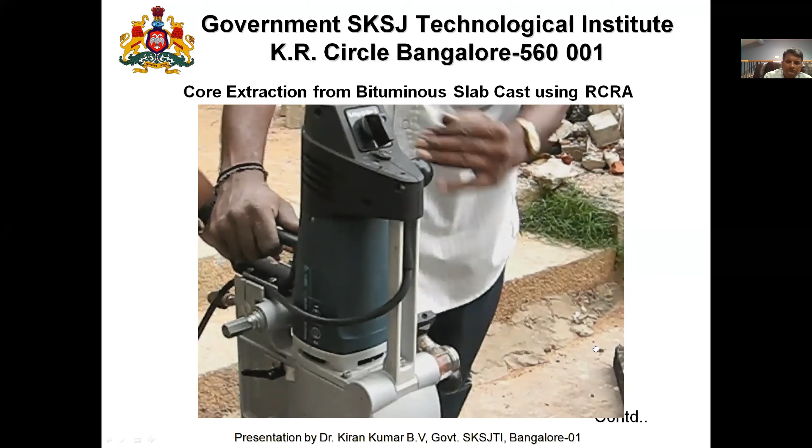So this is how we are trying to change the complete scenario of mix design by just changing the compaction approach. Instead of going for the Marshall or your Superpave mix design with dynamic gyratory compactor, all we need is this particular equipment, and this equipment is not fixed.

It has got 4 wheels. It can be transported to any place. You can do the field test also by using the power of the generator, which is carried along with this particular equipment. So anywhere, any place, you can set up your laboratory, and the compaction that comes from this particular roller compactor is a true representative of your field compaction.

We have laid the test track using the mix design conducted using the Marshall method, as well as the method of using the roller compactor, and also the gyratory compactor. Roller compactor rut analysis values correlate more with field condition cores, which are compacted using the normal compactor.

So in the sense, the field compactors, the big rollers, are all reflected in compacting in the case of your roller compactor in the laboratory. So the shift of the binder content is very much true without causing damage to your aggregate structure. This is a major breakthrough, first point.

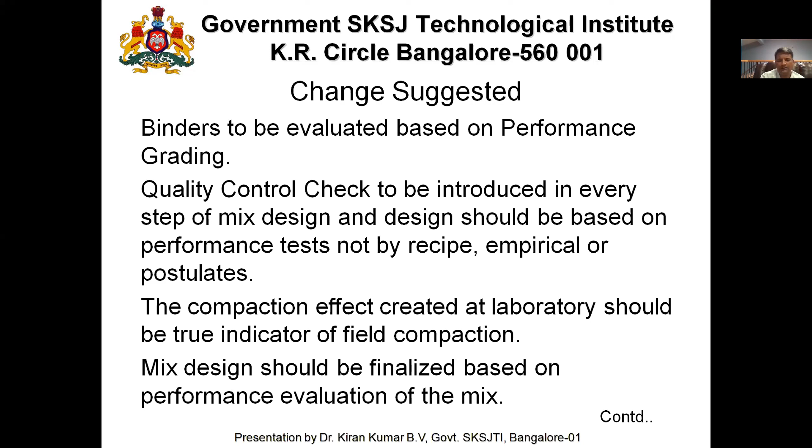So the entire compaction effect can be created in the laboratory, and it will be a true indicator of field compaction. Now the mix design will be finalized based on performance evaluation rather than recipe standard. So the roller compactor cum rut analyzer is a true performer and a vital tool for selection of a better mix which performs in the field.

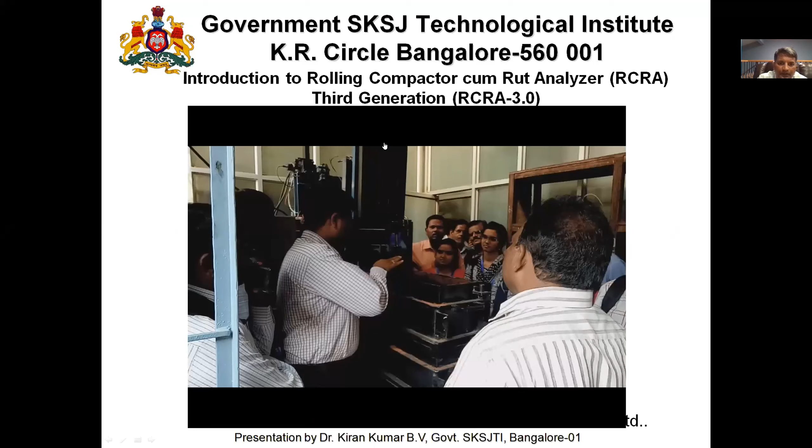You can see an upright surface standing here. Basically, this has tubes that deliver water continuously onto the surface, and these tubes also have heaters. These heaters can simulate the sun's UV rays onto the surface to understand aging conditions. With aging, we conduct the rutting test in the presence of both sun exposure and water.

So moisture damage is basically due to water standing on the pavement — that is a different scenario. No one in the world designs a compactor to replicate standing moisture directly; it's a different scenario. It's about the chemical morphology involved in the bonding between the binder and the aggregate. When the aggregate is held together with the binder, if water enters as a third agent, it tries to strip that bond.

When can that happen? When you give opportunity for the water to stand on the pavement. Our aim is not to allow standing water on the pavement, but to densify it without allowing water to enter, reducing permeability so that densification takes place.

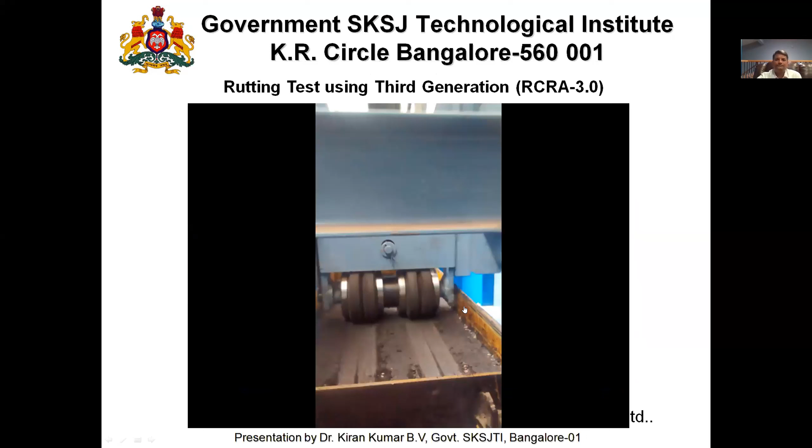The question from Nagashri: what is the credit of reclaimed asphalt in compressive strength behavior compared to the conventional one? This is a very vast topic. When we talk about reclaimed asphalt, it all depends on what exactly you mean by reclaim—what percentage of reclaimed asphalt you're talking about, what kind of rejuvenators you are using, what kind of agents you are going for.

If you are talking about compressive strength in terms of the normal design we do for virgin aggregates or the mix design, in place of that, if we are using 30% or 40% reclaimed asphalt aggregates which have passed all the Section 500 tests—such that it has retained its shape, crushing, and all the strength—definitely it is going to work similar to the virgin one.

There's absolutely no issue unless—you have to check whether the binder coating the aggregate is completely and thoroughly removed. If it is not removed, the rejuvenation of the existing binder should have the same elasticity as the virgin binder. If that's the case, there should be absolutely no problem using the reclaimed asphalt.